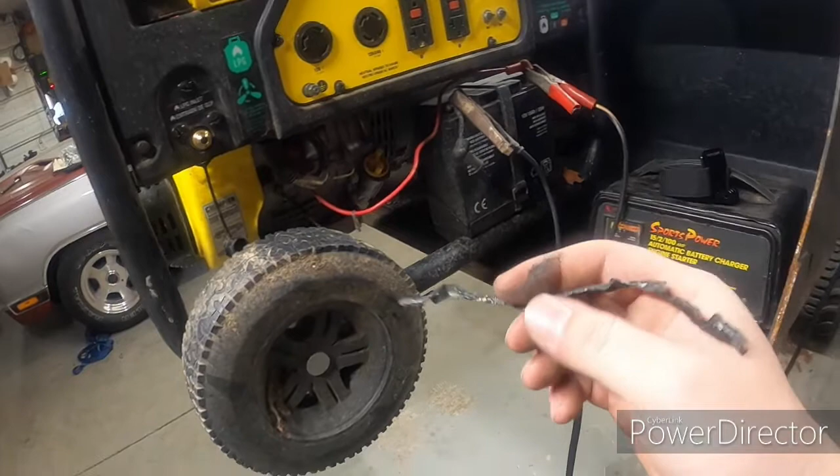Let's check it out. First thing I noticed when I looked at this thing, picked it up, is this ground wire, goes up here to the battery. It is melted and crusty and nasty and, well, not connected. So I don't think that really has much to do with our electric start problem. I think this was caused from the electric start, burning it up.

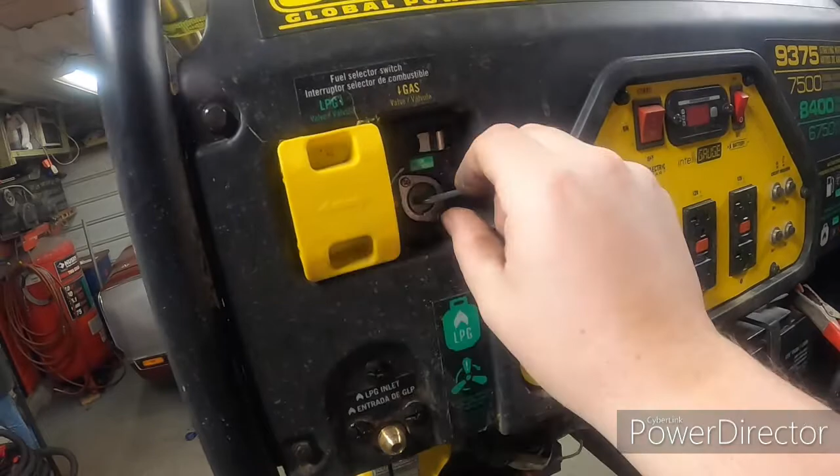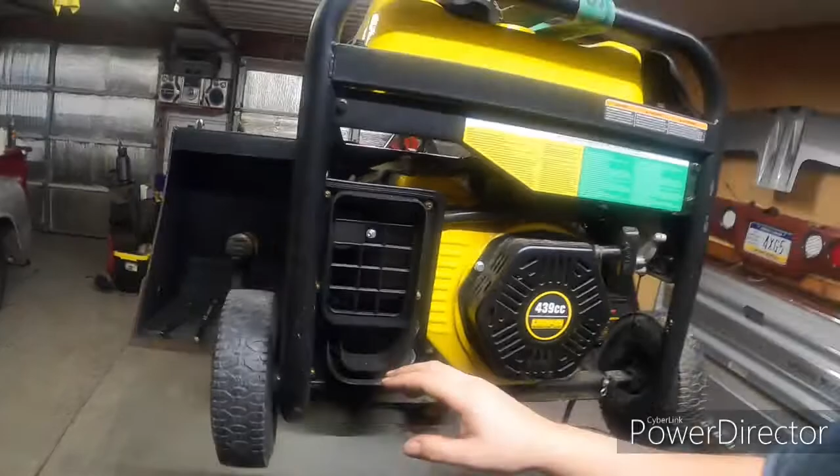Up here we got our shut off on and off for our propane, shut off on and off for our gasoline. Propane hookup, and of course gasoline goes in the top. I already pulled the air cleaner cover off to kind of look inside, make sure there wasn't any kind of debris. We're going to get the cover panels pulled off and I'll bring you guys back.

Okay guys, we got a couple of the covers pulled off. I pulled the air cleaner cover off, loosened up the side cover over here. The carburetor doesn't look bad, but I want to go ahead and pull it off. We're going to give it a good cleaning because it's been sitting a little while. I want to check the gas, make sure that's all good. We're going to go over the regulator, kind of how it works, how it makes liquid propane out of the bottle into a gas form that goes into the carburetor. So let's go ahead and pull this carburetor off.

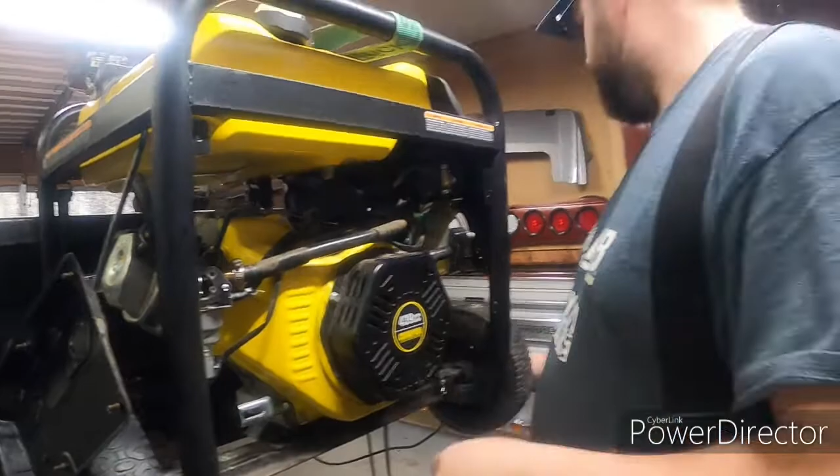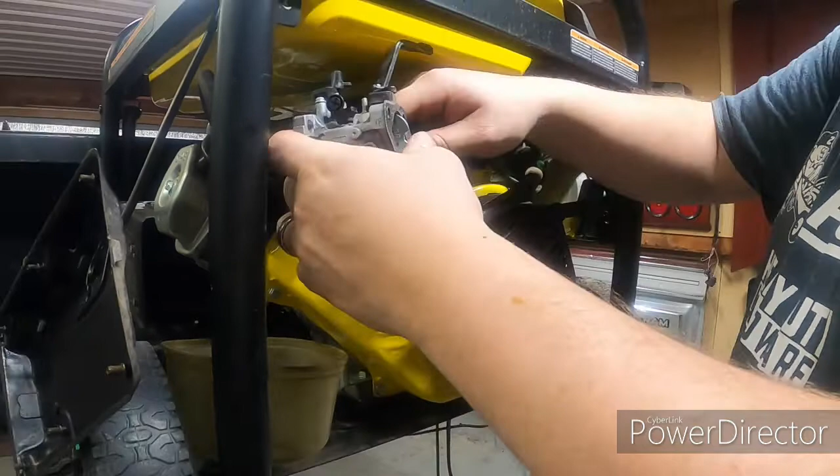Get my pliers, move that hose clamp, pull this hose off here, slide the carburetor out. Now I got a little container here. I have the gas turned off, but I have the container here to catch any that may be left over in the lines. There's just a couple of drops, so no big deal there.

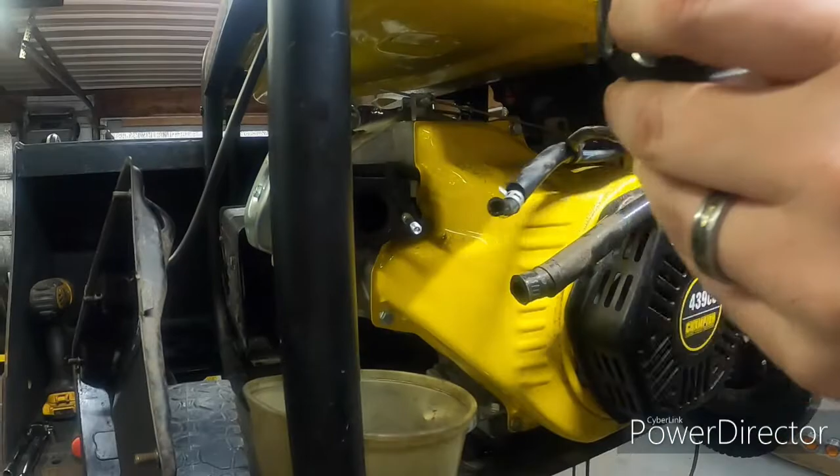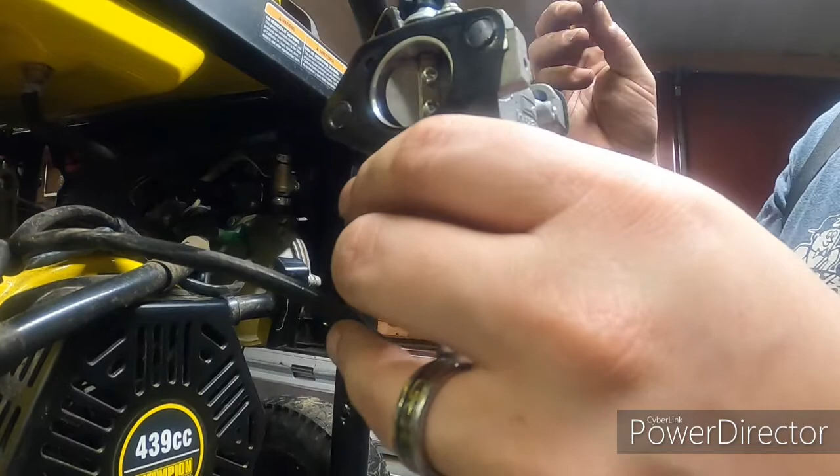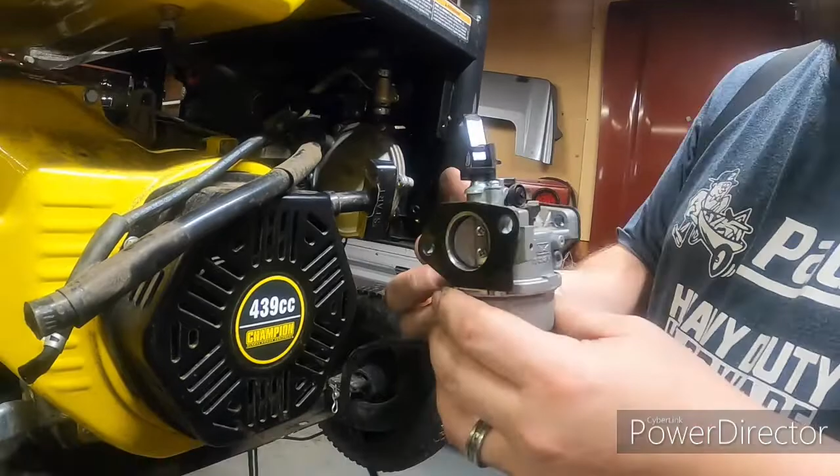So on the bottom of the carburetor here, this is a solenoid that turns off the gas when you turn off the engine. The engine is turning a lot of RPMs when you shut it off, and it would still pull gas out of the carburetor when the spark plug's not making spark. So in order to prevent all that gas being in there unburnt, there's a little shut off solenoid right here. Shuts the gas off at the same time the spark gets shut off.

All right, one thing is noteworthy. As you can tell, I'm draining this old gas out. I could have taken it outside, but it's really windy, the gas would have blown everywhere today. My garage, I have the doors open. You should do this in a well-ventilated area, like I say, I did open the door. If you're doing this and you have heat in your shop, depending on what kind of heat it is, if it's like a wood stove or a coal stove, it is very important, you need to remember that the fumes in here will be flammable.

That being said, that is one thing I love about using my waste oil heater. When I want to do projects like this, it's going to get a little fumey in here, I don't want to risk an explosion, so I just simply shut it down and start it back up when I'm done. I feel it's most ventilated. If you guys remember, that was in my last video, you guys can check that out, that's the DIY waste oil heater video. Really great for doing stuff like this.

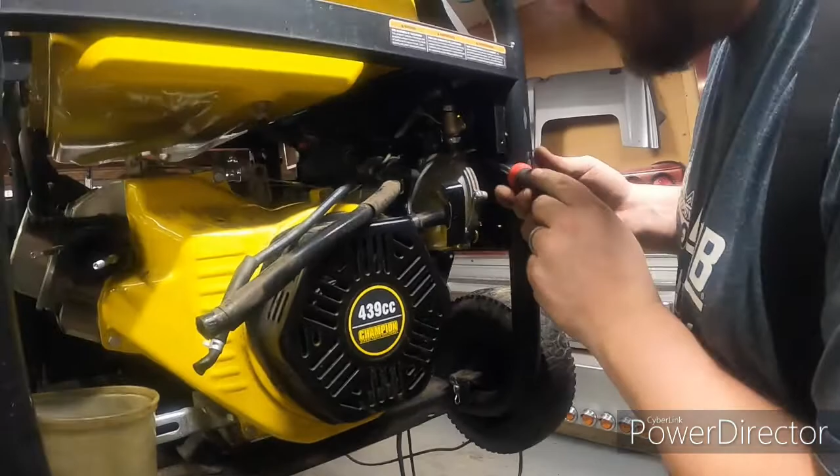Alright, now that we got the carburetor removed, we're going to go ahead and get the propane regulator removed. Of course, I don't have any propane bottle hooked up to it or anything, just simply a hose here. We're going to undo the hose fitting, the hose clamp I mean, they're not a fitting, the fitting goes on the bottle side. Okay.

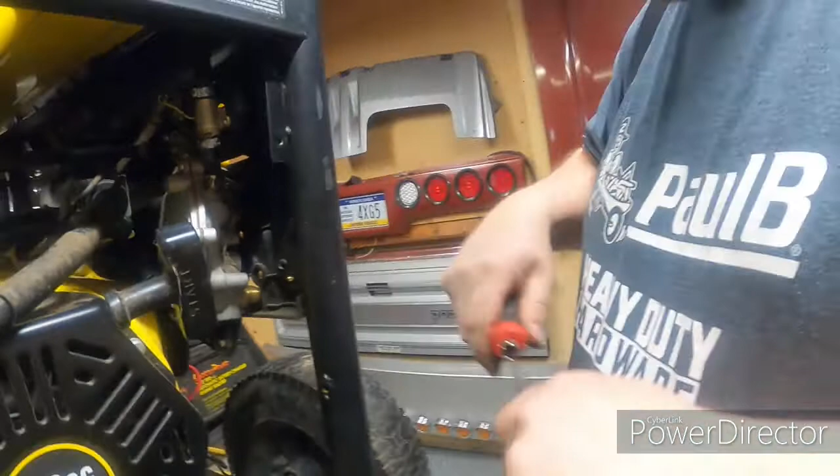Pop that hose up off of there. Okay, and we got it. Propane regulator.

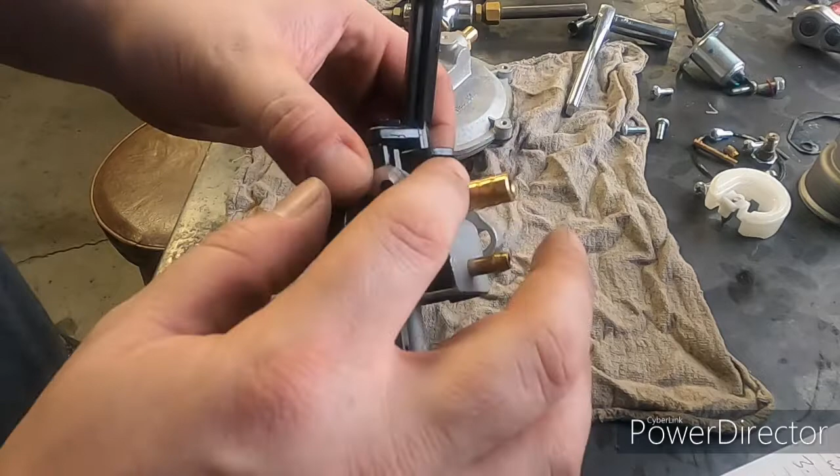In this carburetor, this is where your propane comes in, and this is where your gasoline comes in. The gasoline comes in through where the fuel bowl is, with the needle and the float, and gets sucked up through here where the jets are, into the engine.

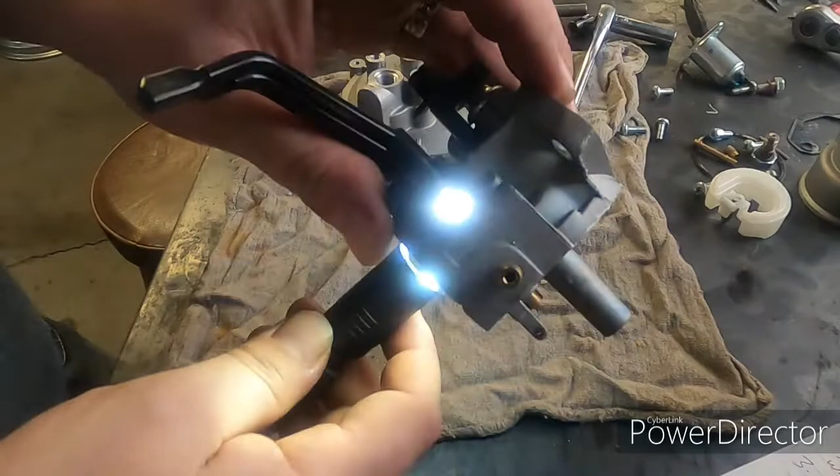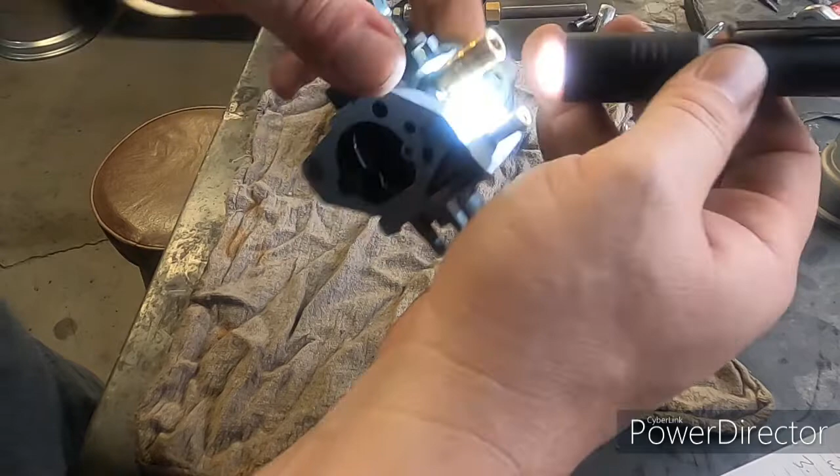However, there are no jets for the propane. It's simply straight through, right into that propane side. So if I put it in this side, you'll see there's no obstruction in there, no jets, nothing.

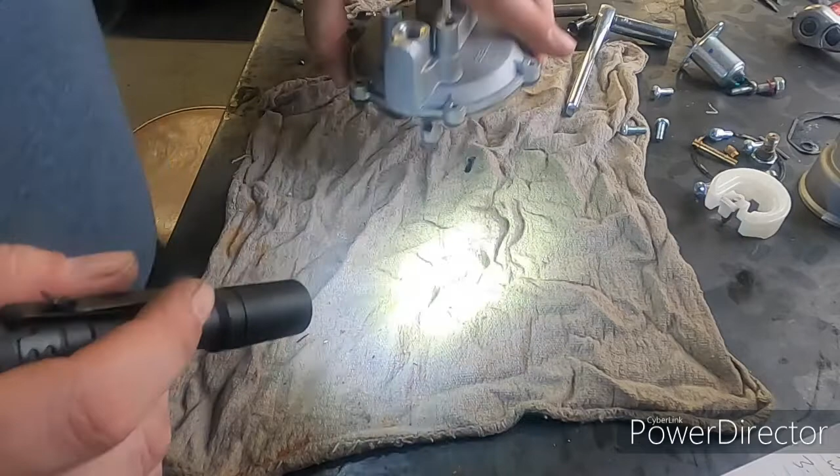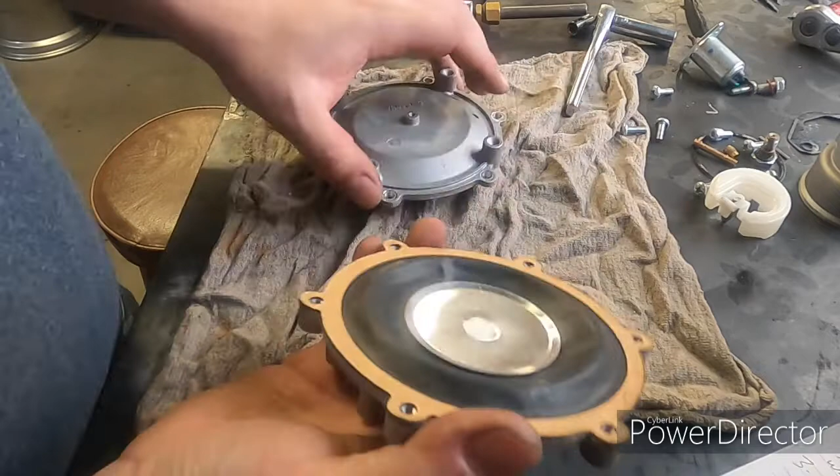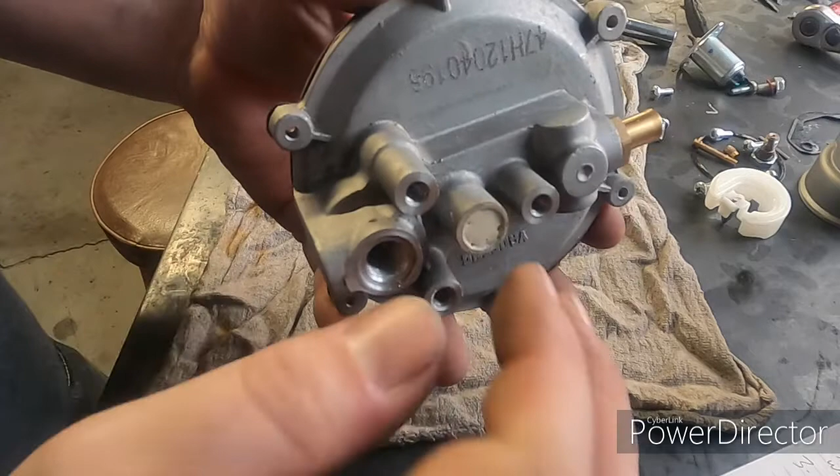So on this regulator, the way it works: the propane pressure gets put in here. I've already taken the screws out. It pushes pressure on this diaphragm, so it's all puffed up. In here there's a little valve, and when this diaphragm moves all the way in this direction, it's puffed out from all the propane pressure.

This isn't as simple as it looks. It's not just a fuel line like you'd think in a gas car, where pressure gets pushed out of here. There's no pressure that gets pushed through this regulator - it's actually a vacuum line. So it comes out of the carburetor right there.

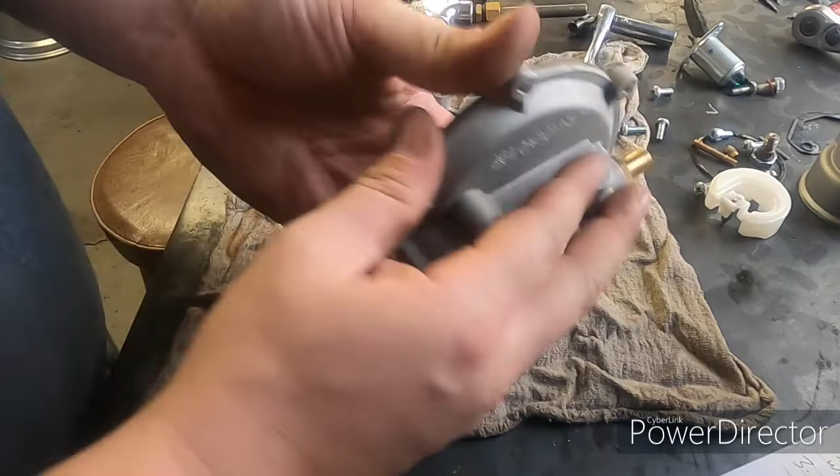You saw it's unobstructed - it's a vacuum line, and it gets pulled out. So pressure in here pushes this out all the way, and it's stopped. If there's no vacuum on here, the pressure is pushing on it, and the valve is basically closed when there's pressure.

As soon as this starts pulling vacuum from the engine - your engine's cranking over, pulling a vacuum - this diaphragm, this valve, you can see it moves in and out here. The valve gets pulled open slowly, and then the propane is allowed to flow through here, though only a limited amount.

That's preset by the manufacturer. It's different for every engine, every size carburetor - every cc of engine is going to have a different amount of airflow.

But that's basically it: propane goes in here, pushes this diaphragm out, which is a valve. In here, the valve is closed. As soon as this pulls vacuum from your engine, it opens the valve and lets the propane flow through freely. The amount of vacuum your engine is pulling determines the amount of propane allowed to flow through here. Real simple, just like that.

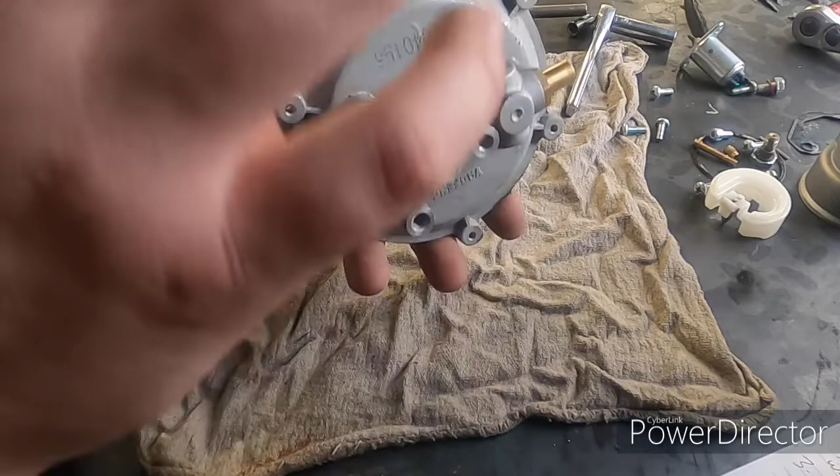There's nothing to it. Blow a little air through there, maybe put just a touch of WD-40, lube it up good, make sure it works fine, and that's it. That's all there is to it.

Okay, so another little tip - I told you I'm going to make my own gaskets. I've got some gasket material here.

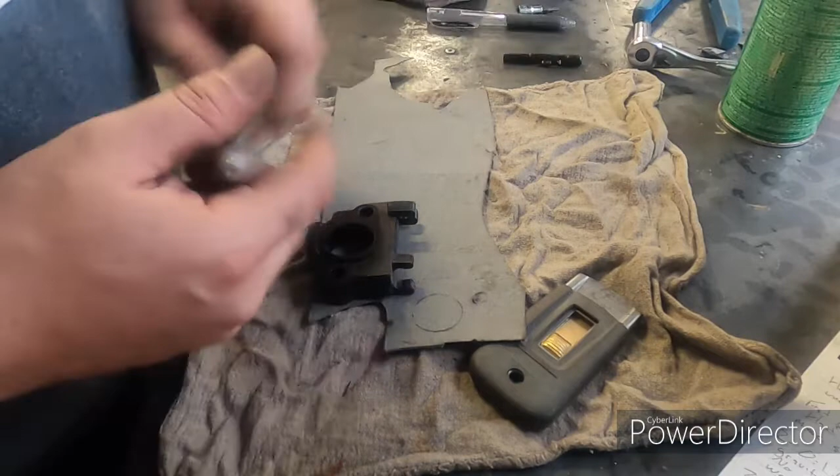If you're doing this and using a flange here which goes between the engine and the carburetor, and using a Sharpie to do your outlines, sometimes you can't always get them inside the holes. If this had an orifice that went all the way through, your pen wouldn't fit, your marker wouldn't fit, maybe a pencil. Take your pen apart, just use the inside - that gets right down inside there real easy. Circle that around, do all your tracing. Neat little trick - some of you guys probably already knew that, just thought I'd mention it.

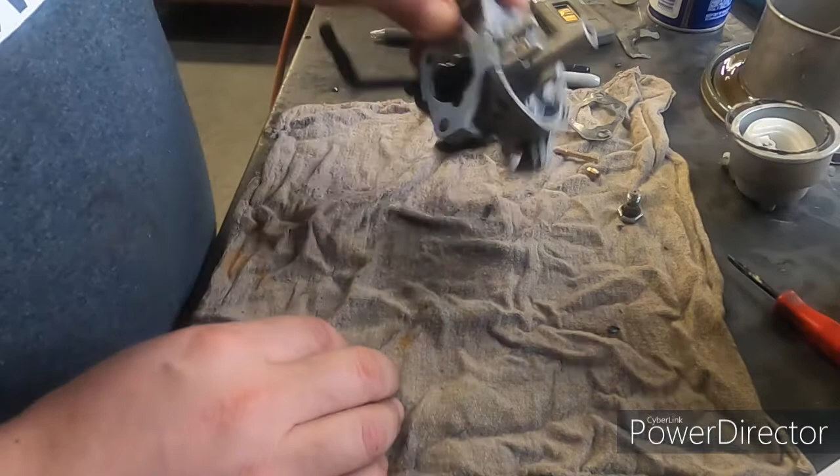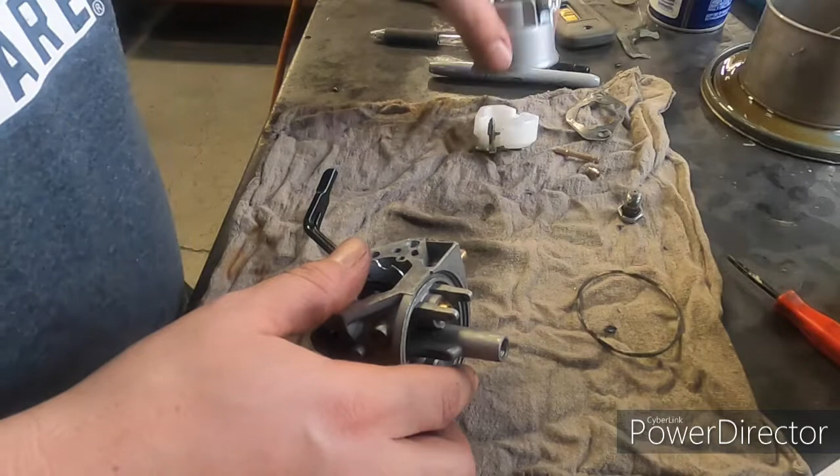So I'm going to show you the reassembly process on this particular carburetor. They're all different, so what you see here isn't going to be the same as what you might see on one of your other projects, a different small engine. But I'll show you quick how this one goes together. There wasn't a whole lot to take apart on this - I already showed you what was here, the screws. There's no external jets to take off the outside.

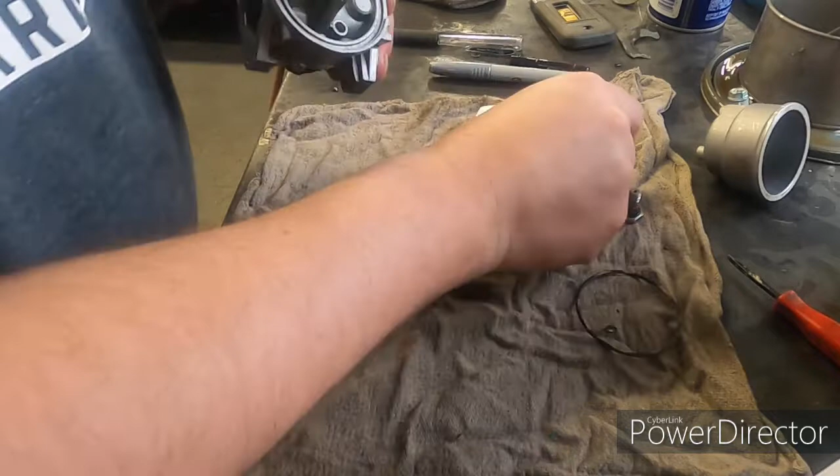It's just simply this main jet drops down in there. None of that is threaded. This is the keeper that holds the main jet in place. It's a straight screwdriver. Let me get the right one here. This one. Perfect.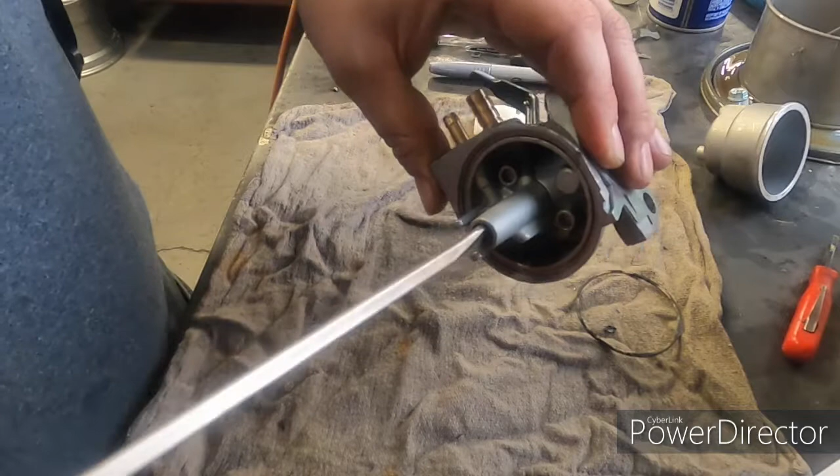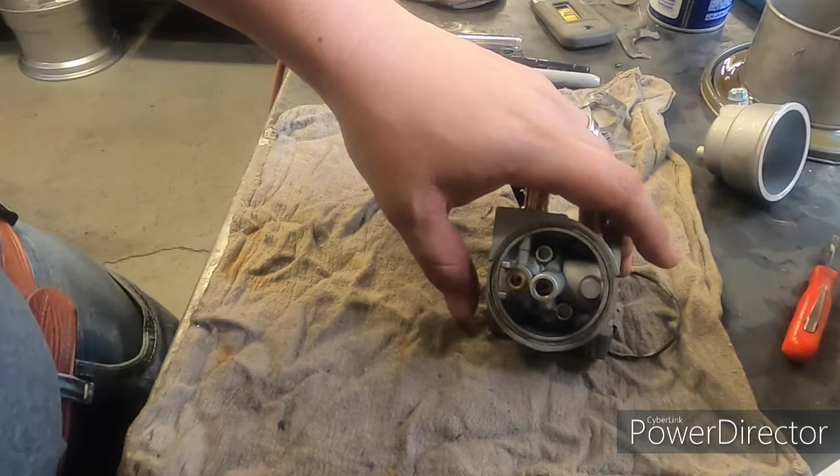Put him in there, and there's no adjustment to this. This just goes in, and it gets tight. Make sure you don't seriously crank these down. There's no reason for it.

If you get one lodged in here, it's stripped out and you can't get it out, you might as well just get on Amazon and order another carburetor, because they are not fun to get out. Brass does not take kindly to easy outs, usually.

On my gaskets, this is a little rubber O-ring gasket guy. I just simply use grease. No gasket maker or silicone sealant on there. Just a little bit of grease simply gets it right down in place. You could use WD-40. A lot of people use that on O-rings.

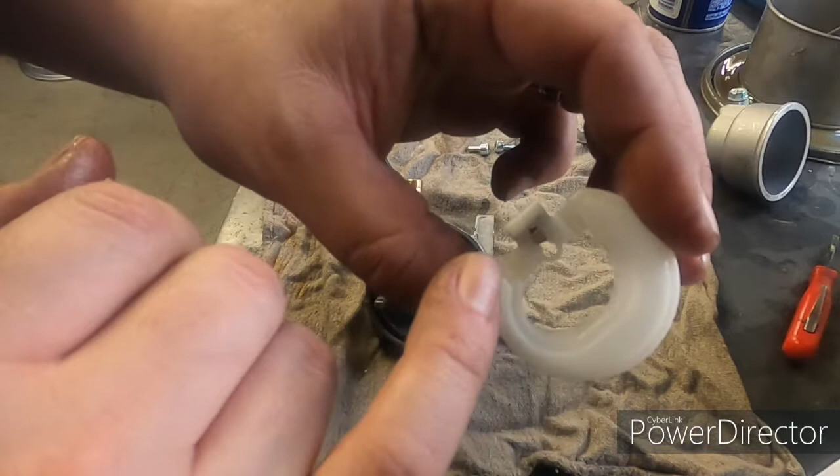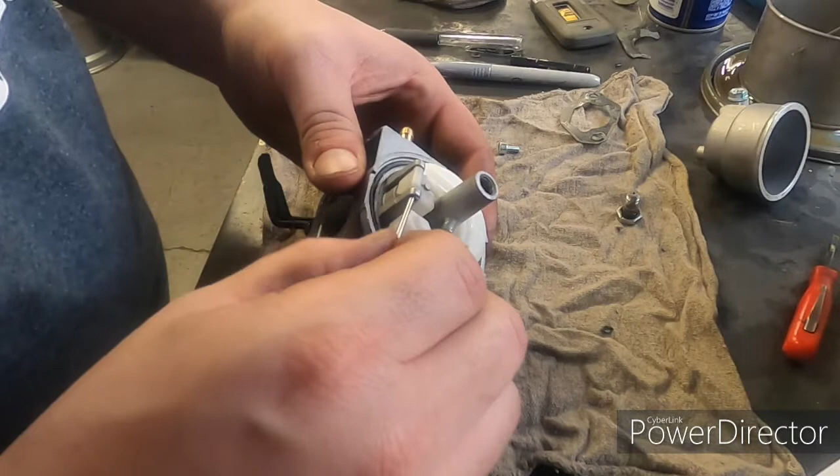Simply goes down in place. I did not have to take the needle off of the float. It's in there in a nice little latched way, down over there. There's not any adjustment on this one as far as float settings because of how the plastic float is set up.

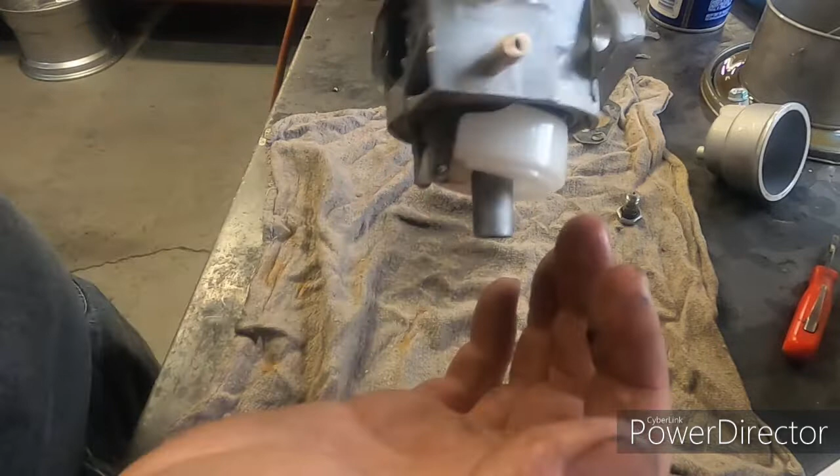You can still check it, and on the carburetor, keep your eye on the needle in there. Make sure it's going up and down, opening. Everything's working properly there. Go ahead and throw this bolt on.

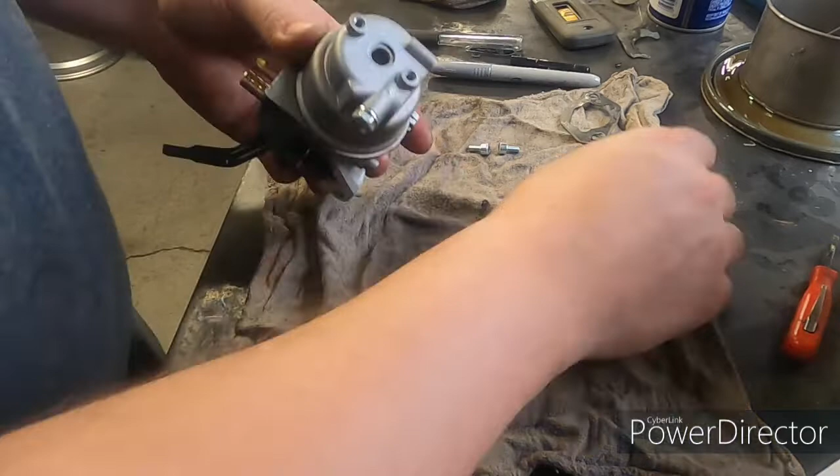Make sure it's clocked in the same direction as it was when we took it off. Spin the nut on the bottom. Of course, I'm going to put this O-ring seal right here. I'll take just a little dab of grease on my fingers. Spin that guy around there. Spin him in.

Tighten him up. Now our shut-off solenoid goes right here on the bottom. That's just simply 2 screws. Goes up in there. There's nothing special about it. And that's it. We got our old gasket that we were able to save. The new gasket I already put on the machine. And that's it. We'll go ahead and get it assembled.

Okay, I went ahead and reinstalled the carburetor. Checked the spark plug, checked the oil. That's all day-101 stuff. We'll go ahead, fire her back up and see what happens.

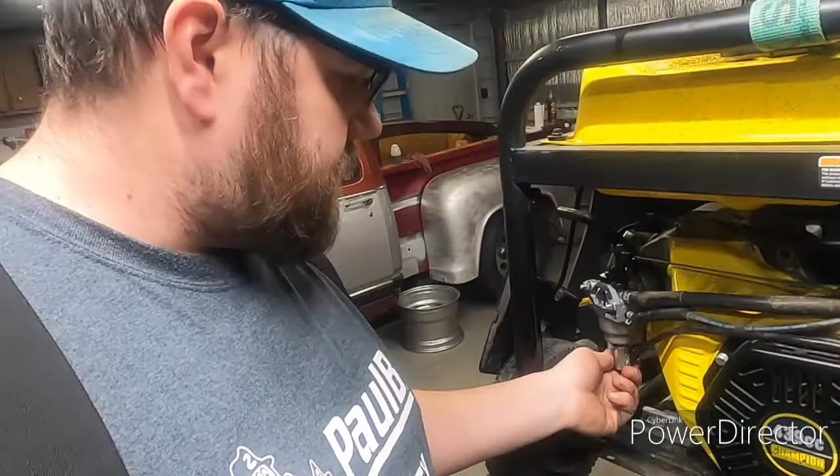Alright, so I left the air cleaner housing off just in case something went awry here. I got easy access. Gasoline hose, propane hose connected, the clamps are tight, regulator's tight, carburetor's tight. There are new gaskets in back here that we made.

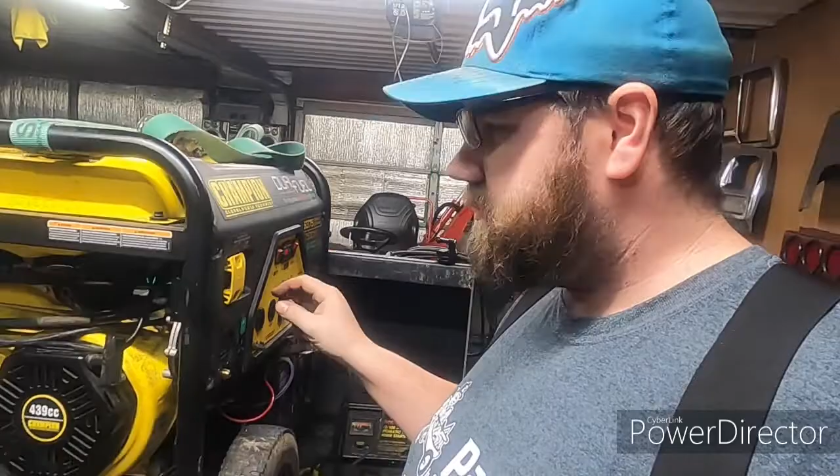I don't have any leaks, it doesn't look like. So we'll come over here to the panel, power on. Put that in the on position. Of course, choke it. I might need 2 hands for this. Fired right up. No extended start. Of course, I did put fresh gas in it.

I'll look around here, see if I have a propane hose. We'll throw that on. Try it out too.

Okay, so we went ahead, we checked the gas side. Again, I double checked for leaks. Everything looks good on that. It fired right up. This might look a little funny. I had to come up with a couple adapters though, because my hose wasn't the same as the generator needed. I did not have the original hose for the generator.

But no problems, throw a couple adapters in there. Ran the hose down. I actually stole the hose from my top hat heater. Should be pretty straightforward.

Turn on the gas. Let's see if she fires up. Throw the choke on, power on, LPG valve on.

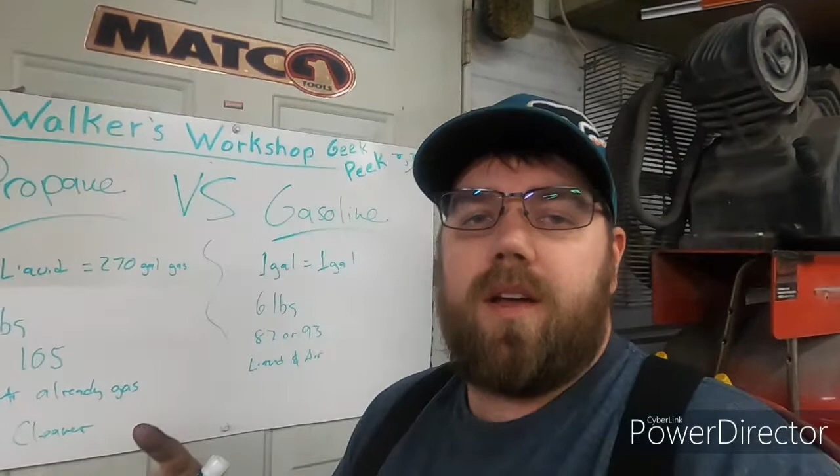Okay everybody, we're going to do our 2-minute geek peek. A little bit of information on the differences between gas and propane, why you might want one versus the other, what the real difference is. The first thing I want to touch on is when you get propane in a grill bottle or a 100-pound cylinder or whatever you may get it in, it's in a liquid form.

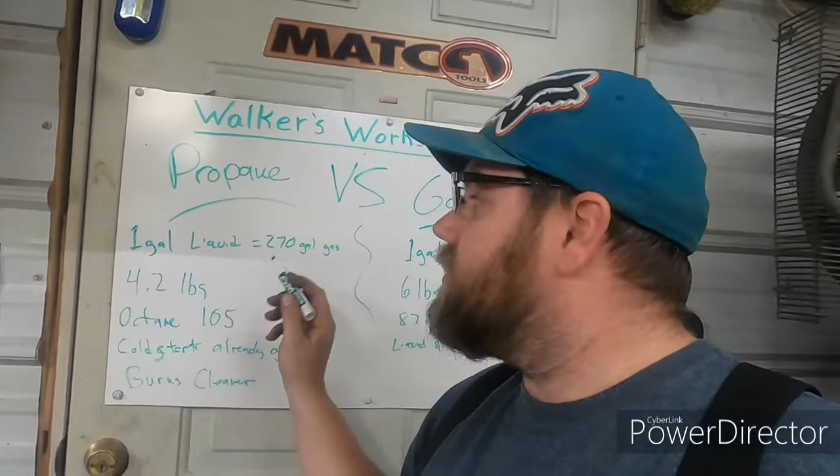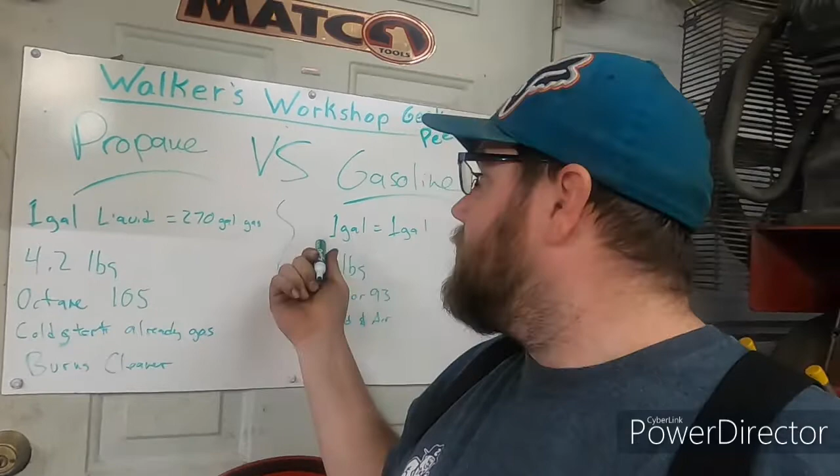So what's inside isn't actually what comes out. When it comes out into the atmosphere, 1 gallon of liquid propane will expand to 270 gallons in quantity of gas. Compared to gasoline, 1 gallon is 1 gallon. It will evaporate off, but it's not exactly the same thing.

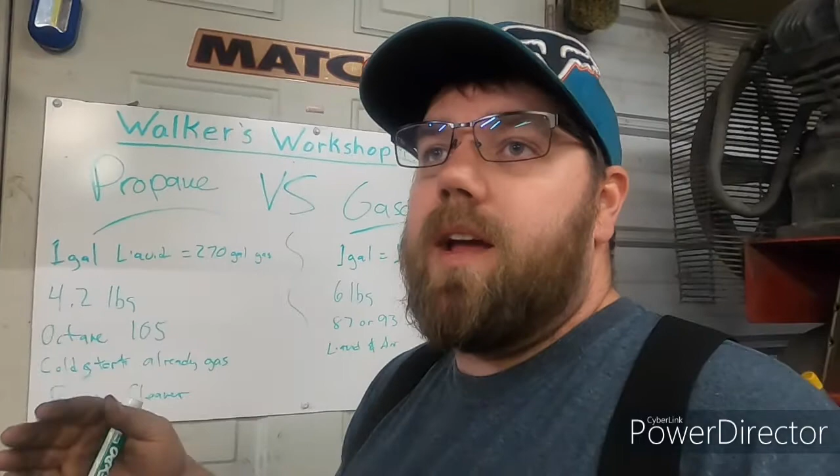The weight is different. This generator has, I believe, a 10-gallon fuel tank on top. 10 gallons of gasoline is going to weigh about 60 pounds. You're going to have that sitting right there, and you need to wheel it around - it's going to be really heavy.

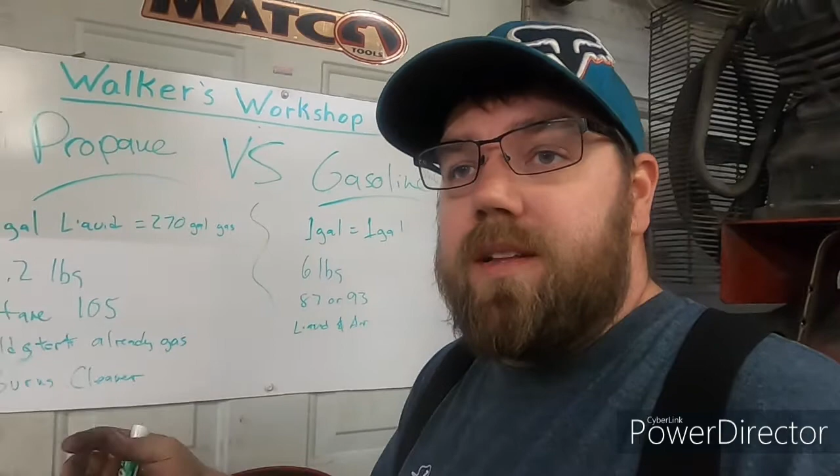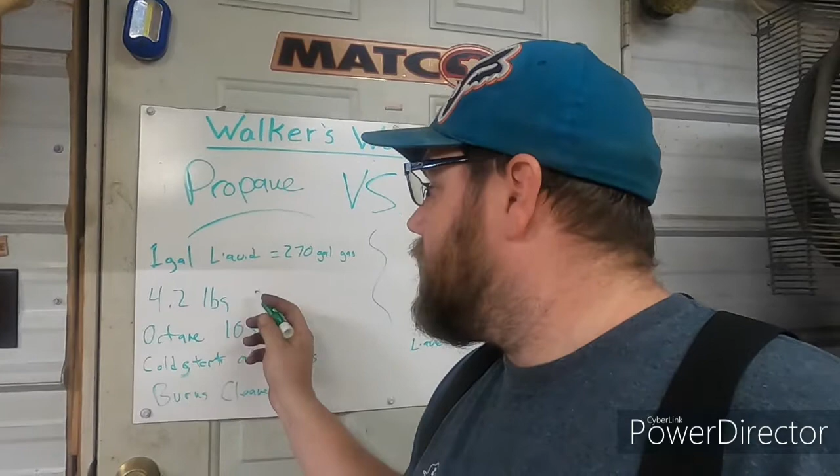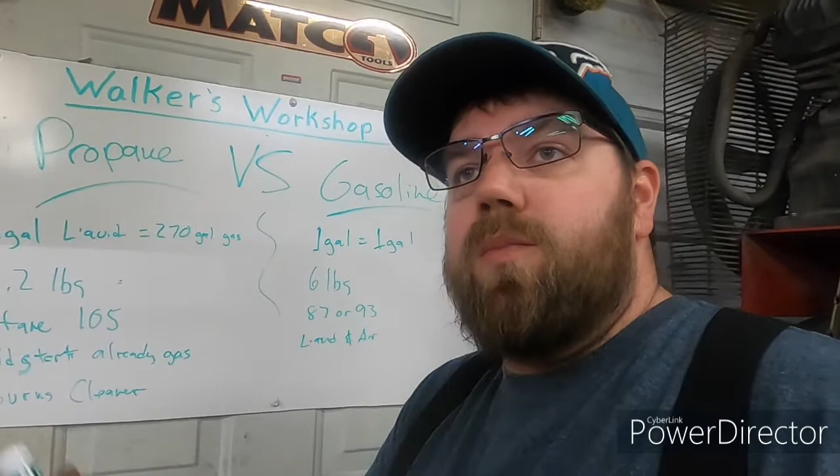Propane is 4.2 pounds per gallon, so you could have 10 gallons of propane and only weigh about 40 pounds. So you do have a benefit there. If you're moving it around a lot, that gasoline can be real heavy, sloshing around in there. The propane is just a simple bottle - you just grab hold of it by the handle and go with it. No harm, no foul there.

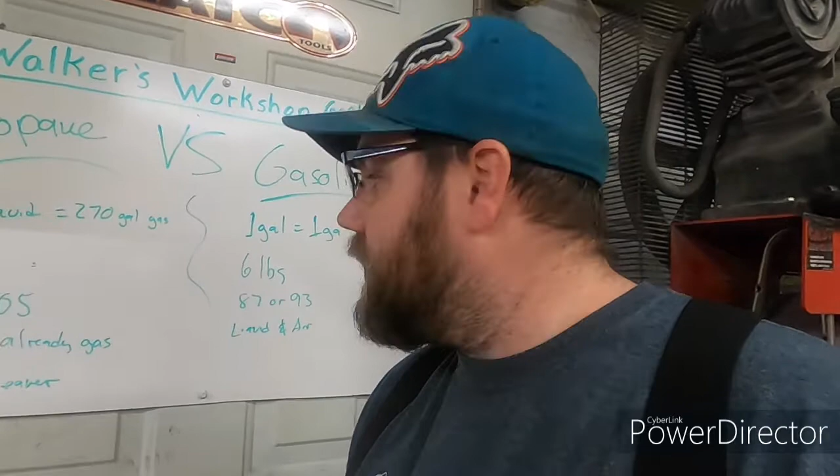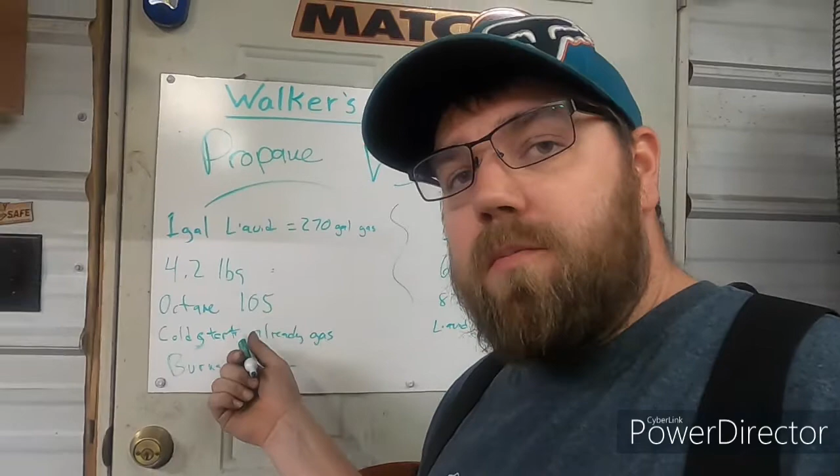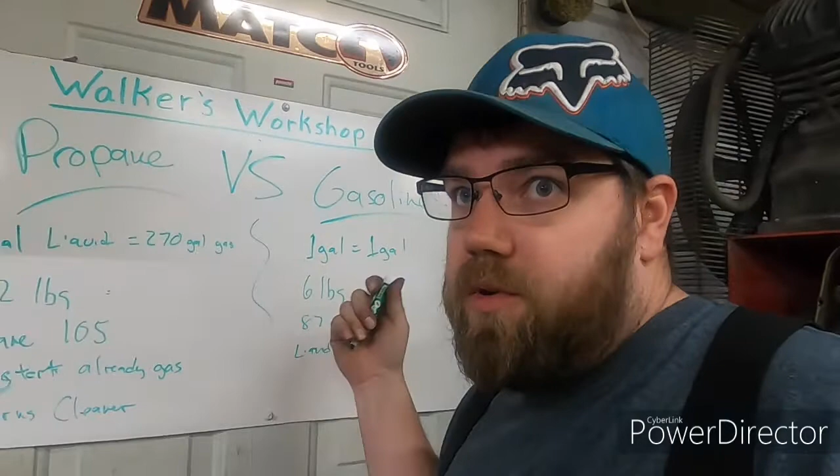There's also a difference in octane rating. Now the manufacturers will tell you they'll run the same amount of hours, say 10 hours on 2 gallons of gasoline as it would on propane. That may be true if it was unloaded - I don't know, I've never really done an experiment with that. But I can say, which makes a difference under a heavy load, the octane rating of propane is right around 105, give or take. So it's going to be a better fuel. Of course, you can put 105 octane gasoline in there if you want, but typically people are going to use 87 up to 93 for premium. I can't see why you would put that in a generator.

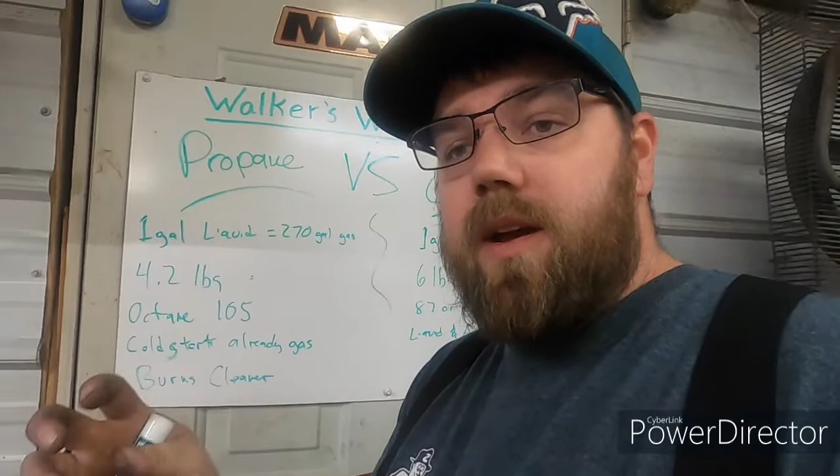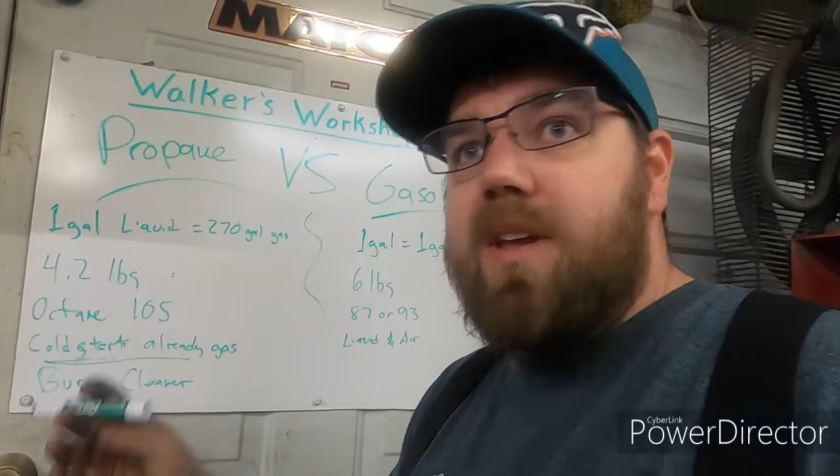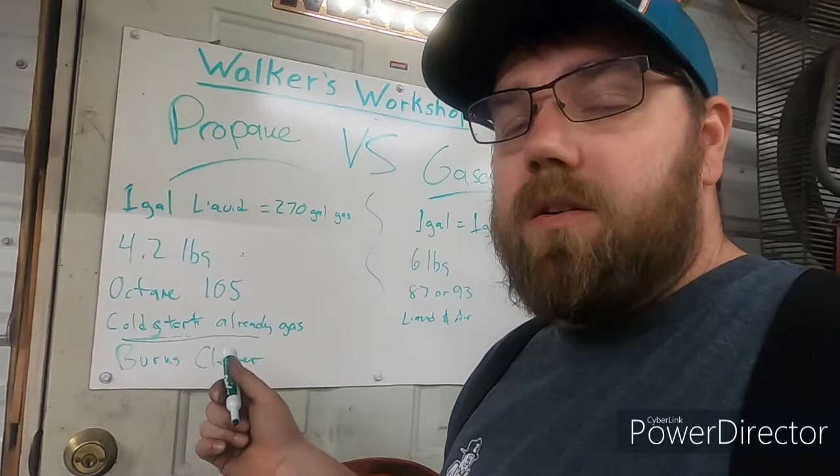When it comes to a cold start, if you're in a cold climate, propane, when it comes out through that regulator, is already in gas form. So it mixes really easily with the air - there's not hardly any mixture happening, it's just combining with that air. Gasoline, on the other hand, you're putting a liquid into air, and it's got to atomize. So in the wintertime, a cold start is going to be easier with propane than with gasoline. Of course, with the choke, you might not ever see a difference unless it's really super cold.

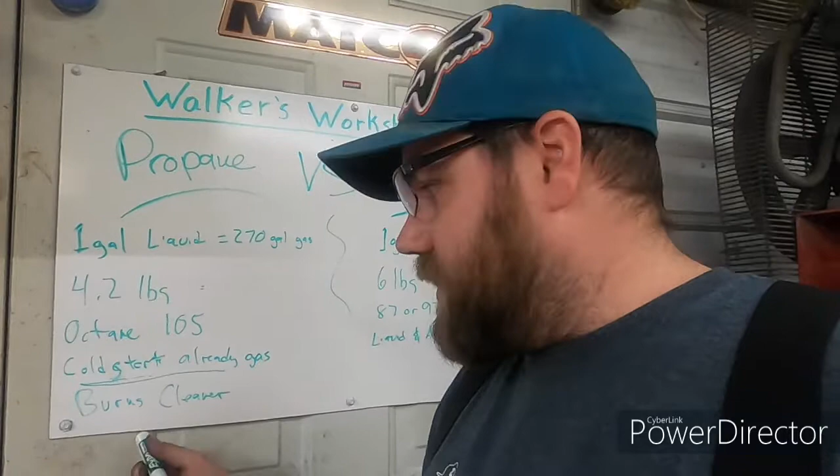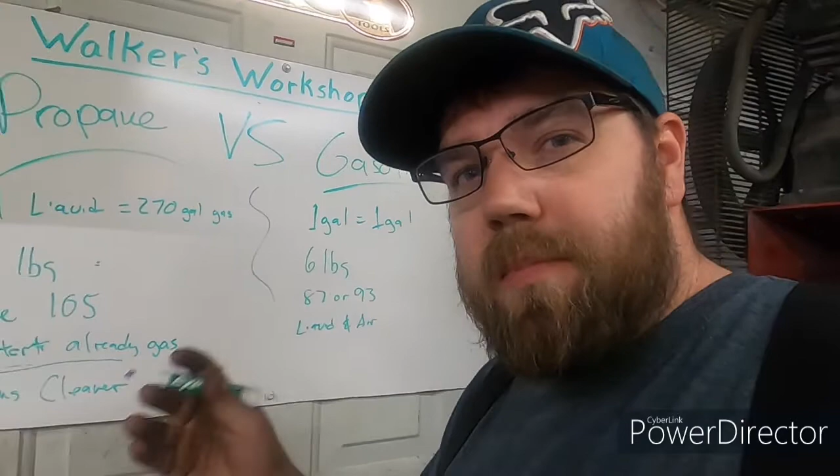The last thing I want to point out is propane burns cleaner. If you think about it, if a gas engine gets flooded - too much gas or something going on there - it will burn some black smoke. Propane will never do that. If you have too much propane in there and it's getting flooded out, it's not going to smoke at all. It is a cleaner fuel.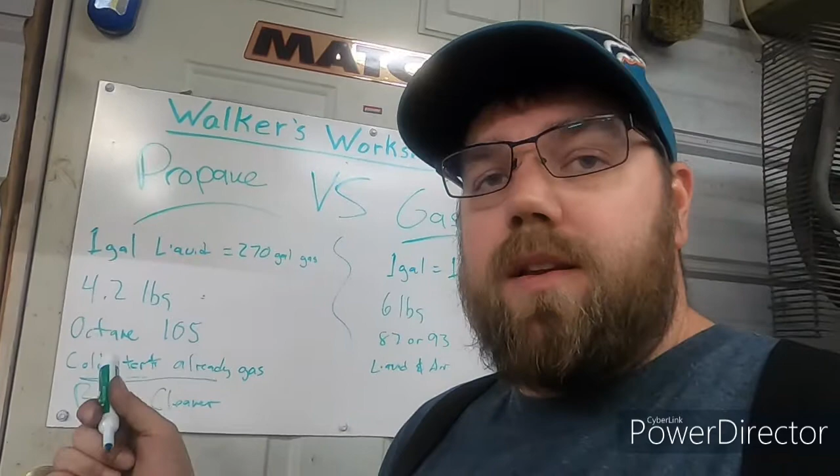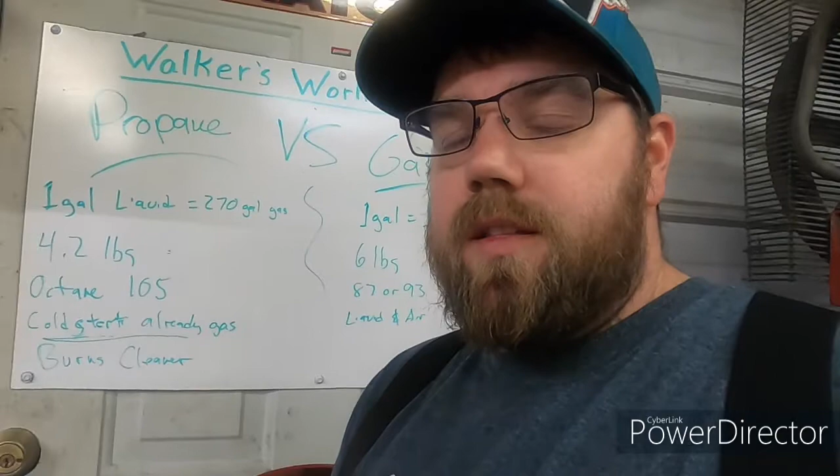So just a couple things to keep in mind if you're thinking about a propane generator versus a gasoline generator. I don't really go either way - they both have pros and cons, they both have their place. That decision is up to you.